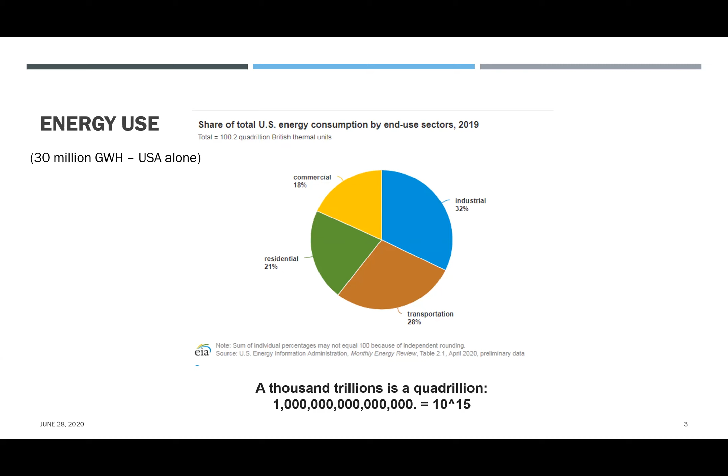So if you look at these major sectors, we are, all of us, from the time we are born to the time we die, always depleting energy in all these four areas, right? So in terms of how the world energy outlook looks, you can get a sense of how the different parts of the world are using energy.

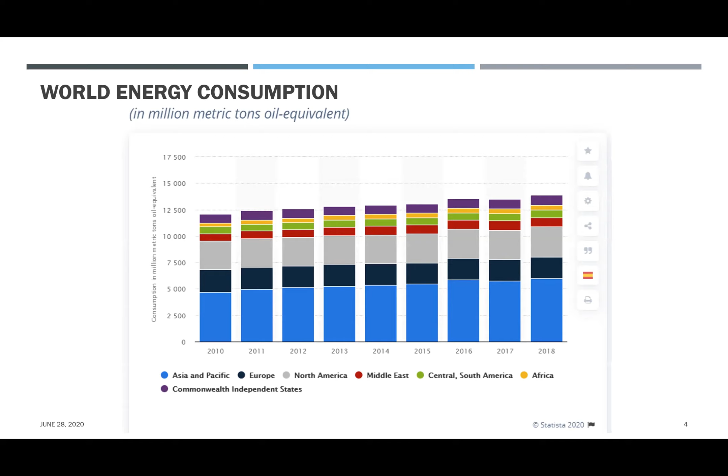Obviously, Asia and Pacific stands out as one of the largest users, as you can see from here over a period of years. North America is number 2 on the list, but it gives a sense that this is a worldwide issue, not just one country or two countries. It's worldwide as to how the entire world is depending on energy and constantly depleting energy as we speak.

So one of the interesting things I found about India, you all probably know, is that we in India are the third largest producer and the third largest consumer. If you look at all countries, that's amazing. Of course, we have a high population as well, but with all the manufacturing activities, data center activities, building activities, and high population, I'm not really surprised that we are the third largest. We have a capacity of 370 gigawatts in India.

And the good thing to know is that the current statistics show that the renewable and hydro combination is pretty significant. 36% is a pretty good number. And it's amazing compared to what it was 20 years ago. I suspect 20 years ago we probably had hydro, but no PV and no wind. But compared to that, we are significantly better than where we were.

So it is noted that agriculture is one of the highest consuming segments within India, which is not surprising because we are primarily an agricultural country in a lot of ways. The unfortunate part is all of us worldwide are still depending on coal. According to the statistics, I believe India's percentage of coal use is 55%, which is pretty comparable to what we see in the United States. I think the United States is declining, but 10 years ago it was probably as high as that. But fortunately, with greater awareness of pollution and greater availability of renewable energy technologies, that number is coming down.

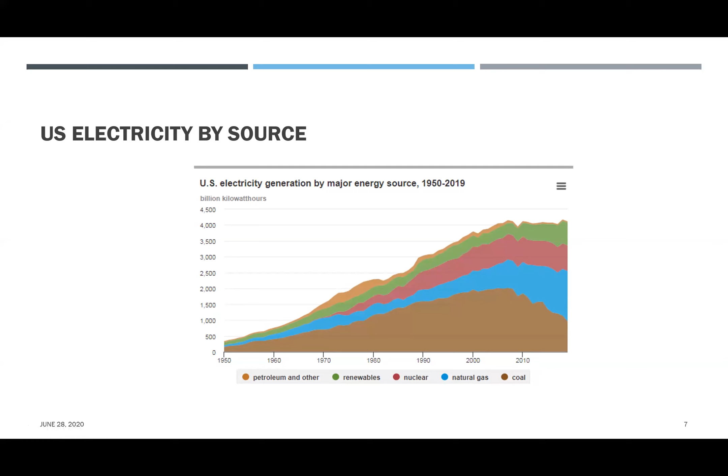As renewables have increased, the coal percentage has continuously gone down. Probably right now it's around 25 to 30% at the most, compared to India, which is at 55%. So I just wanted to give you a sense of some of the pollutants we worry about. The problem with combustion of coal is that while we don't see it, we have to worry about sulfur emissions, nitrogen oxide emissions, and the most deadly one of all, particulate emissions, which tend to accumulate in the lungs and the breathing passages and cause a lot of other issues.

And it is a bit sad that India has not been able to implement them. It is my understanding, based on what we read, that there are a lot of plants that are still without those kinds of controls. And there have been numerous studies that point to the industry and say, look, people's health is getting affected, implement those measures and so on. But it takes time and money and investment. But that's an issue we all face the moment you have a coal combustion device.

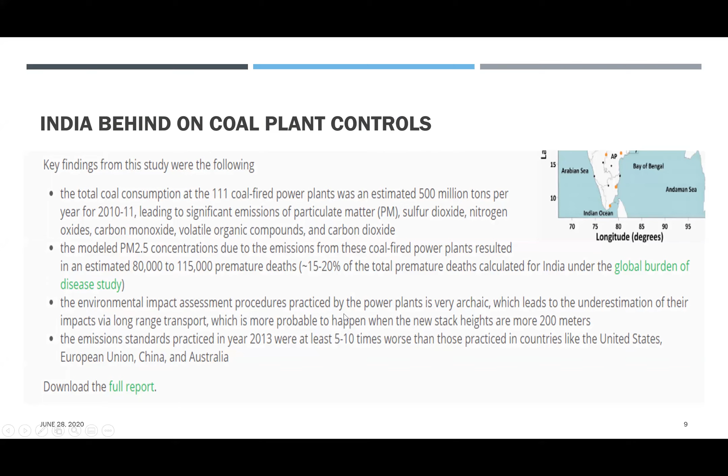What I want to share with you very briefly before I jump onto the renewables is some of the criteria pollutants, right? So when we talk about energy production in the United States, I'm sure it's all over the world, there are 5 or 6 criteria pollutants which are always monitored, because when you decide to put in a new power plant or a new combustion device, even if it's a small college that uses, let's say, a boiler for heating hot water, we need to go through the permitting to make sure that they comply, right? So what are the major criteria pollutants? Certainly many of you might have heard about this.

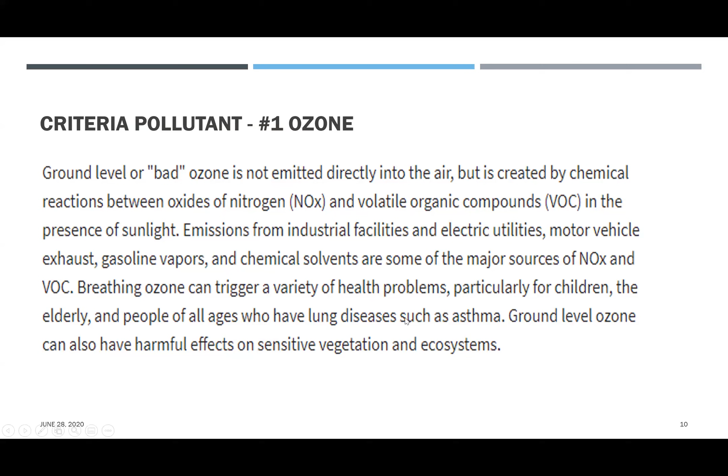Ozone, right? Ozone is the first one on the list. We have to worry about ozone at high levels as well as low levels. Each of them has a certain impact on the overall environmental health of the population. The next major pollutant is sulfur dioxide. We talked about the impact of coal combustion, right? Any fuel that has sulfur, including diesel, some of the petroleum oils, fuel oils, and coal especially, has sulfur content. So sulfur content in excess has a huge impact on human health.

The next major pollutant is particulate matter. The control technology for that is bag houses, electrostatic precipitators. A lot of times when you drive by on any Indian road, freeway, you'll see on the side people burning husks and waste and all that. You look at the dark smoke and the carbon and soot and everything else. You don't see the particulate matter, but anytime you see those kinds of combustion going on, even a fireplace at home, you are potentially exposed to particulate matter, which is unfortunate.

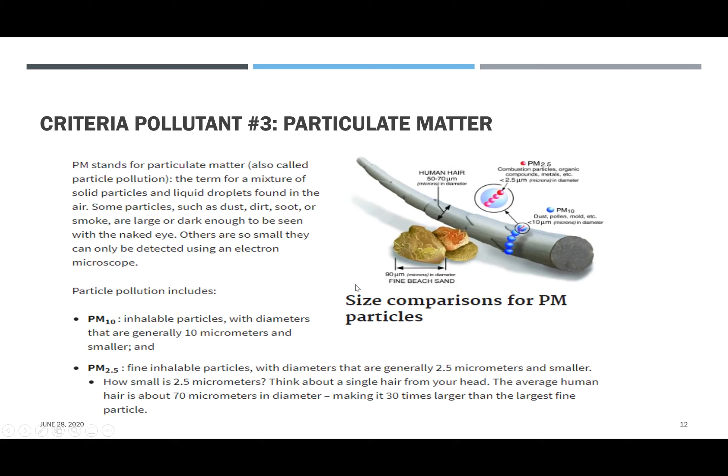And there are different grades. When they say PM10, they talk about particulate matter which is around 10 microns. PM2.5 is particulate matter that's 2.5 microns. So they have various ways of categorizing particulate matter so that the technologies for controlling them can be designed for capturing that particulate matter. Carbon monoxide, of course, everybody knows the danger of carbon monoxide.

Very often you hear stories about how people went to the garage, closed the garage door, left the car running, they got on the cell phone, kept talking. They didn't realize how the carbon monoxide level in the garage built up and they died. So you hear some stories of that nature. So carbon monoxide is a nasty component that can kill without persons being aware of it.

We hear a lot of stories, especially in American East Coast cities where we have in-house furnaces, right? Because the temperatures in East Coast, we're dealing with -10, -20 degrees sometimes in extreme climate. And a lot of the homes are designed with furnaces inside the occupied area. And if those furnaces misbehave, if they're not checked frequently or cleaned, and if they have a bad flame, we have heard stories about how carbon monoxide emissions from that furnace can kill people, right?

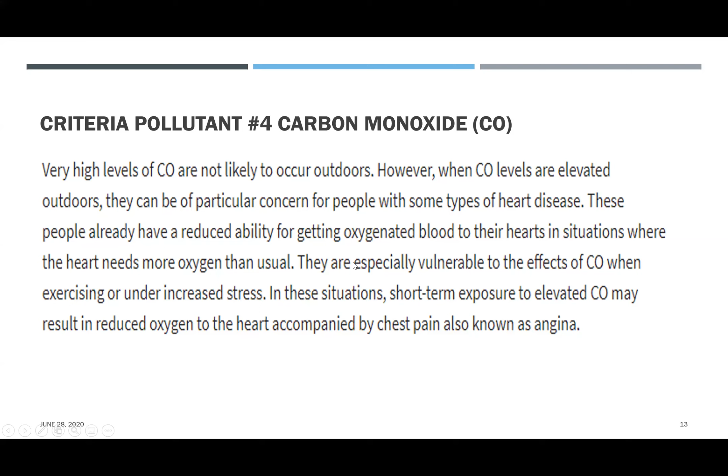So there are numerous dangers that we encounter daily in our life. So we need to be watchful of what those are. Nitrous oxide is a big deal, right? Obviously, it leads to smog and respiratory problems and all that.

So anytime we do a project here, we have to demonstrate, whether it's a boiler, whether it's an engine, whether it's a reciprocating engine, or whether it's a 25 megawatt gas turbine engine, we have to go through air quality permit districts to make sure that we have in place mechanisms to control the emissions within a certain limit, right? So those are all very tightly controlled.

We cannot do a project in most of the United States without tight justification that we have done a good job in controlling the emissions to what is known as best available control technology. It's called BACT. And the BACT continuously changes depending on what happens in the industry. They continuously tighten the grip on what the latest emission control technology should be for a project to be permitted.

So it's a constant battle. It's one of the biggest battles every project developer goes through, rightly so, when it comes to developing a project. And I hope there is an equivalent system in India, but I'm not sure. I've been out of the loop.

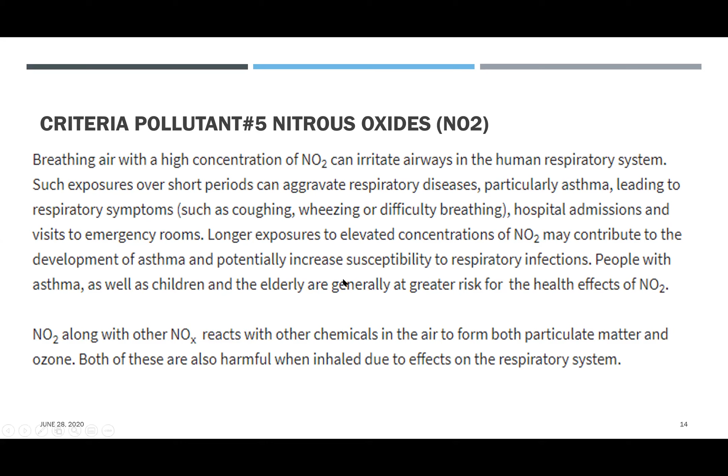So the last criteria pollutant we're talking about is lead, which is the 6th largest thing to worry about in terms of criteria pollutants. A project developer, when he's proposing a project or building a project, has to go through a permitting agency to make sure that the best available control technology is used for regulating and controlling the emissions, which is a very important part of the process.

And I just mentioned that I've been out of the loop from Indian permitting, so I don't quite know what process you have to go through, but hopefully there is something good that ensures that people like you and me are protected from polluting sources.

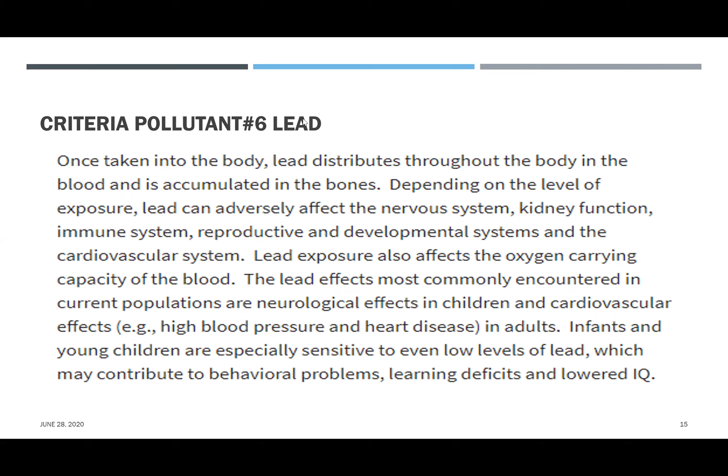All right, so before we jump on to the specific renewable technologies, the one thing I wanted to mention, I talked about greenhouse gas emissions, right? So the big deal right now in, I would say, 80% of the American institutions, especially colleges, large universities, is how do we operate buildings and systems to minimize greenhouse gas emissions? That's a really big thing in America right now, because we all realize that we as a society need to do better to make sure that there is no global warming.

And we need to make sure that we leverage the current available technology in renewable energy and try to minimize the carbon emissions, right? Which is part of the global concern on greenhouse gas emissions. So if you look at the major components of the greenhouse gas emissions, obviously carbon dioxide, right? That comes from the combustion source, whether it's coal or natural gas or biogas, we always have carbon dioxide emission.

We have refrigeration, right? We have chillers that produce air conditioning. The chillers have refrigerant that cause impact on the environment, that's why they're categorized as part of the greenhouse gas emission.

Then we have methane from landfill, right? As consumers, especially in America, we produce a tremendous amount of waste, right? Huge amount of waste, which all goes into landfill eventually. And the landfills have methane contribution. Fortunately, in many parts of the country, we have installed burners to burn natural methane that is produced in the landfill to produce power, right?

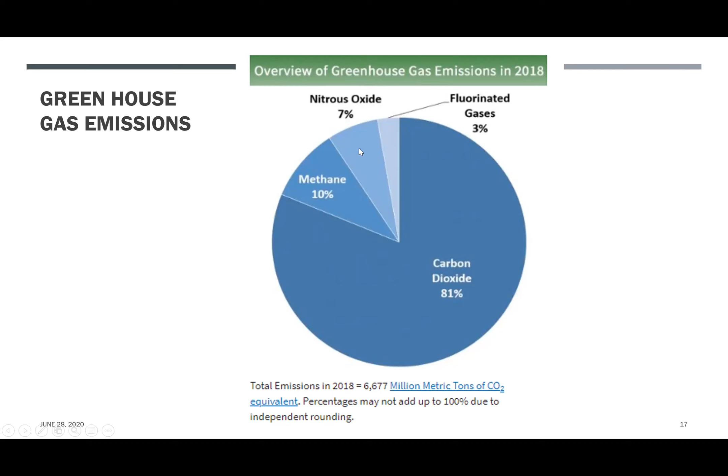So there are some places where landfill gas has been used effectively, but so long as we humans create a tremendous amount of waste, unfortunately, we continue to contribute to methane. And of course, nitrous oxide is also part of the greenhouse gas emission.

So now let's talk about how the photovoltaic industry has changed over many years. I started consulting in 1990. Those days, in fact, when I came to the United States in 1981, there was probably a single company in the entire country that was producing small size panels. When I say small, I'm talking about 50 watt, right? Think of a 2 feet by 4 feet panel, we're producing 50 or 60 watt those days.

And it was costing a horrendous amount of dollars. So people said, forget it. We don't have time and money to invest on a panel that costs you 10 times more energy than what we're paying. And that was the era in 1980 when I came to this country. But look how much the industry has transformed over the last 40 years. So the serious production of the panel probably started in the late 90s, and you can see the gradual depletion in overall cost compared to where we were.

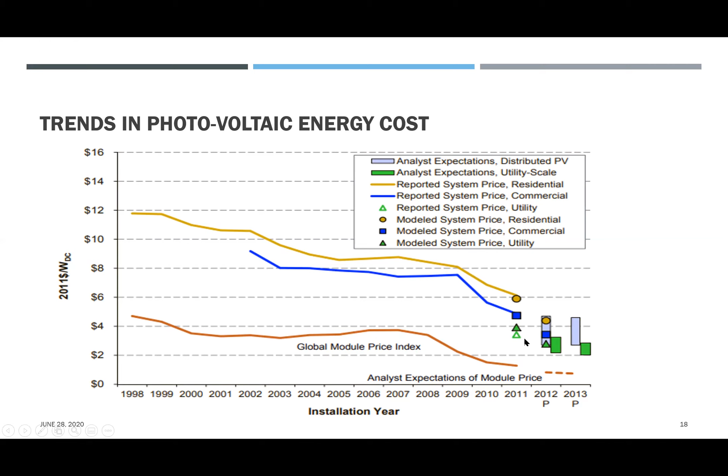And today, I believe some of the largest photovoltaic projects are priced at $2 per watt compared to what it was. So, thanks to the Chinese panels, there is a tremendous amount of production coming out of China. As far as the consumer is concerned, the price of energy has substantially dropped. I'm sure it's the same in India as well, that you're able to enjoy better prices compared to what it was.

I gave you a sense of all the infrastructure that goes into making a PV system happen, right? So if you start thinking about the various ranges of PV available, you can have PV at your home, in an office building, in a parking structure, or a ground-mounted PV somewhere far away from the communities. So there are many different locations where you can install photovoltaic. So the challenge is, what are the downsides of installing PV? What does it take to really maintain them?

Of course, a lot of times we put it on top of a roof of a house or an apartment complex, and we expect things to work, right? But things do require maintenance. So I just try to identify here the typical things that we have to deal with. First of all, you have PV modules. Over a period of time, depending on where you live and how much dust accumulates on it, it has to be constantly cleaned.

If you forget about it, a lot of times we get a call from a client saying, hey, Chet, can you come and check out why our PV system is not producing? You go there and look at plant weed growth, and you have things sitting on it. You have bird droppings, nobody cleaned. So unless you maintain the system, you cannot expect power out of it.

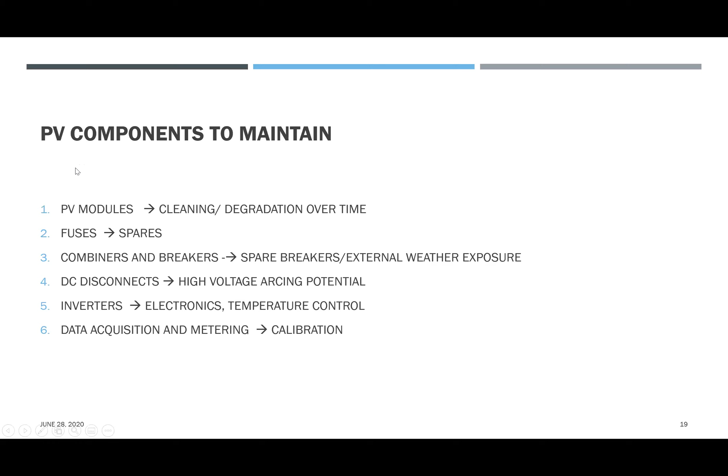So let's move on to the next topic, right? So now we have a sense of the PV in terms of what it takes to design, what it takes to maintain. Looks easy, but there are a lot of little details one has to watch out for. Now let's look at the wind turbine.

Now, the fascinating thing about the wind turbine is that when I came to California, I would say in 1982, we used to see one single turbine made by Boeing. That was like 1 megawatt. And every time we went by the freeway, on the way from Sacramento to San Francisco, we used to see the turbine, but I never saw it running. It had a whole bunch of problems. And that was infancy, right? But Boeing took the lead at that time to come up with a turbine concept, which probably hardly ran.

But the fascinating thing that has happened over the years is that today it's a common thing to see, in many parts of the world, turbines that are rated for 1 megawatt up to 3 megawatt, 4 megawatt, huge turbines. We're talking 200 meters blade, 180-meter blades. But there are many challenges, so let's go through a simple wind turbine component, right? What it takes to maintain a wind turbine. You got the blades. These blades are ridiculously long, and it's a challenge to transport the blades.

You have got bearings that allow for the rotation. If you look at a typical wind turbine, you could be looking at 120 miles per hour tip speed when the wind speed is 12 to 15 miles per hour. So you got huge distances, speeds to deal with. And look at the amount of design engineering it takes to design a blade that can run at that speed. Look at the amount of centrifugal force that is involved, the mechanism that is involved in building a very tall support structure to support the whole rotating component.

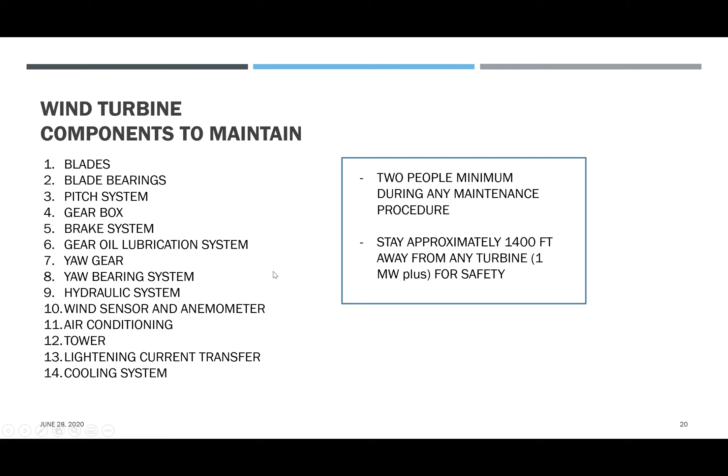The main thing you want to know is these technologies do exist. They have matured a lot, but we can never take it for granted. There are tons of things to maintain, tons of things to work on. Nothing is bulletproof. Over a period of time, you also heard about offshore wind and onshore wind; both are available currently.

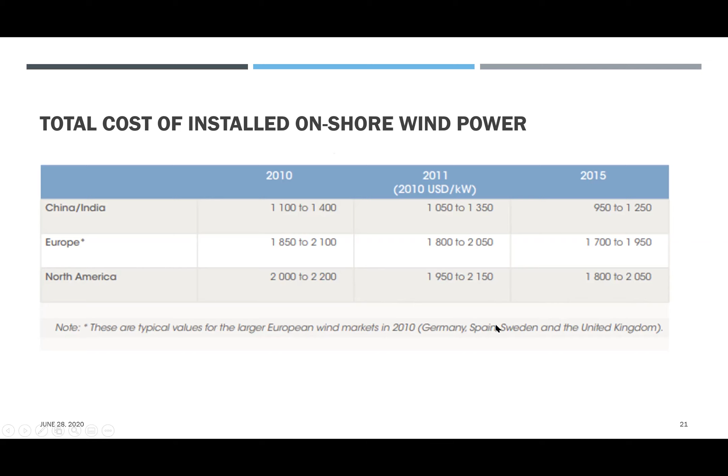But the good news, as I tried to show here, is that the cost in dollars per kilowatt has gradually come down, depending on where you are. For conventional power, a typical rule of thumb is about $1,000 per kilowatt. But the fact that PV and wind are currently available at around $2,000 per kilowatt is a pretty good step in terms of making renewable energy more affordable. Hopefully with time, they'll go down further.

Let's talk about some of the impact on the environment. Like I said, everything has an impact on the environment. No matter what we do, we can't run away from it. The biggest impacts of wind energy are two things. One is the impact on bird life and bat life, because birds and bats fly in massive swarms, and there's a big concern about endangering those species.

And the second big impact is noise. That's a huge issue, because when developers site wind energy, especially large ones, very close to communities, that's a problem. Typically a wind turbine system can be producing, right next to it, as much as 100 dB. As you step away from it, obviously the sound level decreases.

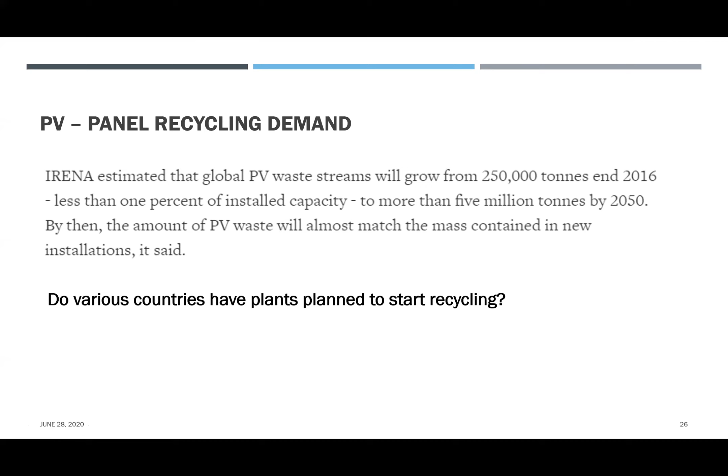So here's an example of the issue I talked about in terms of the quantity of waste that is created and what we have to watch for. And as we increase our PV production, our next generation, our children, our grandchildren, that generation will have to deal with potential disposal issues. So it's very important that we not forget our obligation in terms of planning for that scenario.

So hydro, right? Obviously you've seen hydro energy as well, and there are very large plants using hydro energy. And the biggest downside of hydro is the impact on fish and game, right? One of the state departments in California is a department called Fish and Game. Their only job is to make sure that these hydro projects are situated in such a way that they do not impact aquatic life, right?

That's very important. So it comes back to what I was saying, that no matter what you do, we humans are well known for creating an impact. We just have to figure out, is there a process available? Is there a permitting process in place? Is there a regulatory process in place? Is there somebody policing you to make sure that you do the right thing and not rampantly impact the environment?

And of course, hydropower, like anything else, you have to think about where the opportunities are, where there is enough water head available, where there is a natural dam available, or the possibility to collect the potential energy that water has and convert that into power. And the challenge is doing it in a safe way, right?

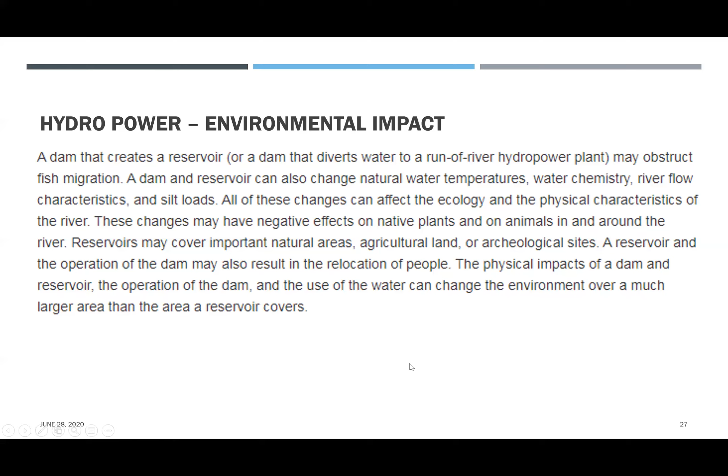So one technology that is quite popular, very expensive, unfortunately, is fuel cell energy, right? So fuel cell energy is basically taking a gas like methane or natural gas and breaking it down into carbon dioxide and hydrogen, and you allow hydrogen to mix with oxygen, and it produces power.

So the power efficiency of the fuel cell can be as high as about 40-45%, which is very good compared to a gas turbine combined cycle plant, which is probably around 37%. So we can get about 45 to 50% of just the power efficiency. Now, on top of that, if you're able to recover the heat, another, say, 30% to 40%, so potentially you can achieve an 80% efficiency in a fuel cell.

But unfortunately, the cost: remember I mentioned about $1,000 per kilowatt is kind of the standard default for conventional power. So these can be expensive. This can be $3,000 to $4,000 per kilowatt. Although we have installed these in some of the campuses, one of the first projects we worked on was a project here in Cal State Northridge. The same company installed, I believe, a 1.5 megawatt fuel cell, if I recall correctly. It takes a good amount of money and investment, but it's interesting technology compared to the conventional.

So does it take more maintenance and more cost than PV? Yes. So for the same reason, I think when customers have chosen fuel cell, it is mainly because they wanted to use both power and heat together, as opposed to just power alone.

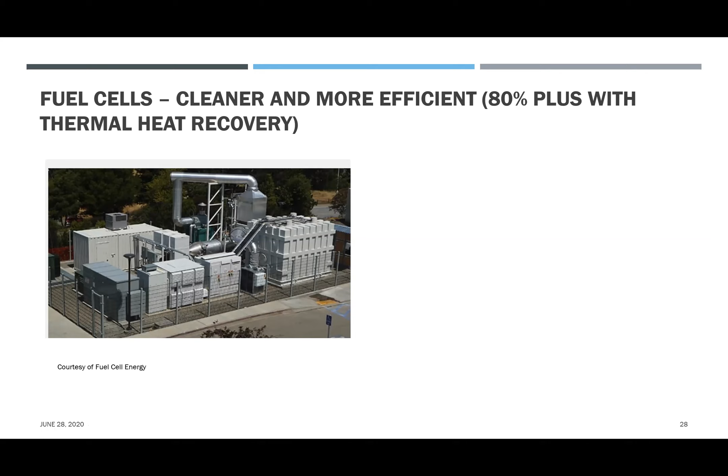So just to summarize what we talked about on renewable energy, although you and I can put PV panels in our homes, which is not a big deal, right? We have a small power. But when you start thinking as a developer who wants to develop large photovoltaic projects or wind energy projects, you have to think about the transmission infrastructure, right?

So the transmission infrastructure is existing. Utilities own it, at least in the United States. You have various public utilities. You have utility investors who have funded the utilities to provide large transmission infrastructure.

So if I have a transmission infrastructure that can only support 50 megawatts, let's say the wire size on the poles that go across the hills and mountains is about 50 megawatts, and I'm a wind developer coming in and saying, okay, I want to put in 100 megawatts of turbines. How in the world is that going to happen, right?

So you need to make sure that when you select a site, you consider the available limitation of the transmission infrastructure so that the power you produce can be effectively transmitted from point A to point B. So it's a huge limitation. One of the biggest challenges worldwide, especially in the United States, is we have huge bottlenecks.

Although we have a very wide transmission network, and I'm sure the same thing applies to India as well, these are old infrastructure. It takes billions of dollars to refurbish them. So you might see a phenomenal potential of PV or wind energy somewhere, but it's impractical to deploy it unless the utilities invest in upgrading the transmission infrastructure to bring the power from point A to point B. That's very important.

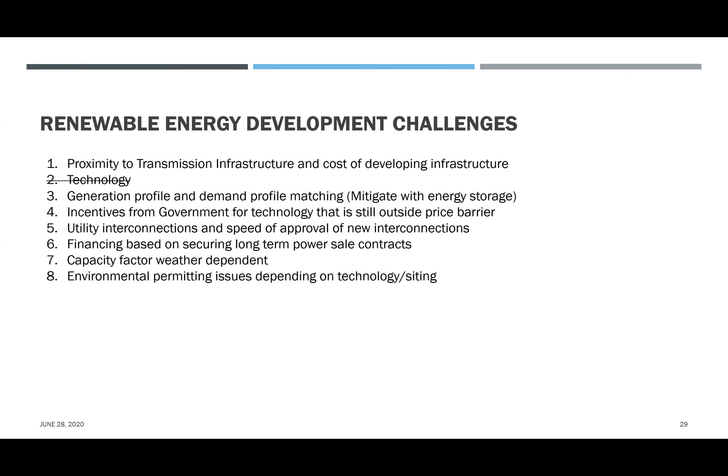One of the reasons the photovoltaic industry took off was that for a long period, I'm thinking almost a 10-year period, the utilities were made to provide incentives, called self-generation incentives, so that developers can make use of the incentives to build those projects. Fortunately, we are in a place in the United States where incentives have been provided for photovoltaic, wind energy, and so on.

So the next thing I want to talk to you about is energy storage. PV is a good example, right? So we have, let's say, a photovoltaic project that produces power during daytime. And a lot of times your demand is not there on weekends. I might have high demand on a weekday, but Saturday and Sunday I may not have demand because the business is closed. So how am I going to store the energy, right?

Or if I want to just shave off peak demand, let's say, typically in most utilities, the peak period is always the most expensive period, whether it occurs in late afternoon or evening. So we have battery storage technology currently.

Now obviously battery technology is also new, right? It's gaining popularity slowly for two reasons. Number one, of course, is the ability to store energy in an efficient way and use it when you need it. And the second thing is it is actually helping peak demand shaving, right?

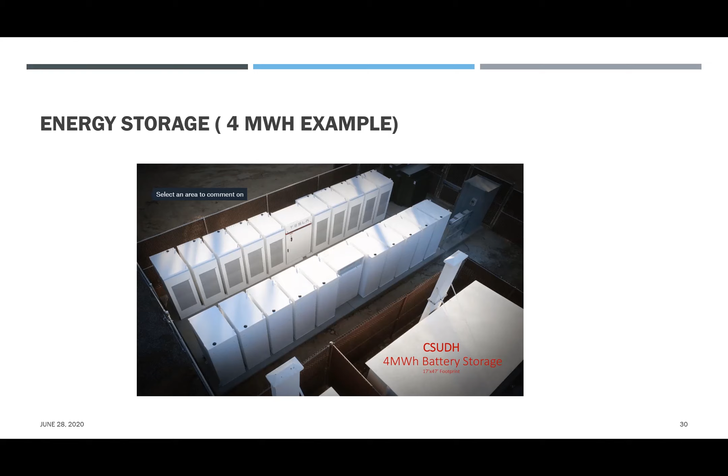And it applies to honestly both residential and commercial. I know that there are many homes and apartments in India already using batteries, but this is a little more advanced, more efficient battery system where you can use your PV energy generation, store it, and use it when you need it. So just like we have storage for electricity, we also have storage for other things, like chilled water is a good example, right?

I mean, you and I probably work in office buildings that are typically air conditioned. And generally speaking, during daytime when it's hot, that's when you don't want the equipment to run because there's already enough demand on the utility. Of course, these days we have PV power, but 10 years ago, we didn't have photovoltaic power, right? So how do you avoid running air conditioners during daytime?

So what we do is we actually have cooling devices that run at nighttime, store cold water, chilled water we call it, at let's say 39 degrees, 40 degrees temperature in a storage tank. These storage tanks can be 100 feet tall by 80 feet diameter. Think of it like a large building, except it looks like a big tank. So we can store the energy in this storage tank and draw it during daytime to cool the building. So that's a pretty common thing that we see.

In fact, I'm working with CSU, California State University System, which is one of the largest university systems in the world. So literally every campus within the California State University system uses this technology for minimizing daytime demand. And also, when we run the chillers at nighttime, we actually use less energy because the nighttime temperatures are lower for the wet bulb. That makes the heat dissipation a lot easier from the cooling towers. So that's the technology that we use to help overall reduction in managing overall energy resources.

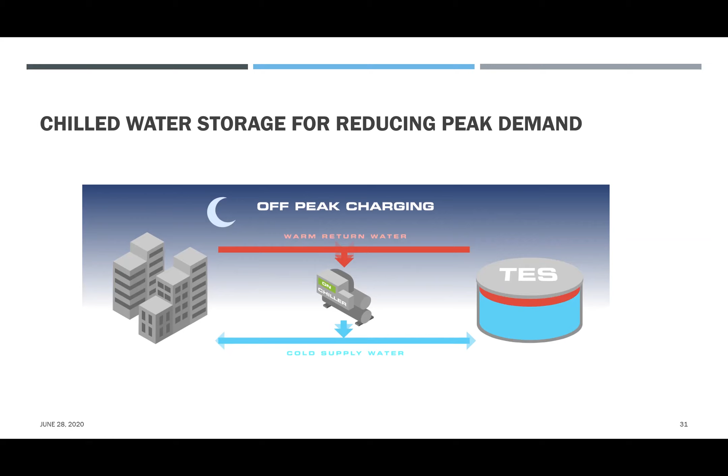Now let's step back. You heard me talk about the various aspects of the industry, and let's say that you're an aspiring developer, entrepreneur who wants to develop renewable energy, whether it's PV or wind energy. Just think about some of the challenges and the players that are involved in this development, right? So let's assume for a moment that you're a developer. You are the lead when you're the developer, because you need to bring all the parties together to make things happen, right?

So one of the biggest things is you got to deal with permitting, right? So when you decide to build a project, you need to worry about, is there transmission capacity? Is it permittable? You need to deal with public utilities. What kind of a relationship am I going to have? What kind of interconnection agreement do I need to have in order for my project to connect with the existing utility? Because ultimately, you're not going to build brand new transmission lines. You need to depend on the utility to provide your transmission line.

So there are strict requirements on how a project should be tied to the utility. There are strict requirements about how a project will impact the environment, whether it's hydro energy, whether it's wind power. There's always a permitting issue. Now, the reason that's important, and I'll get to that shortly, is that when you think of a global scale, the entire nation's transmission system or a state's transmission system, it's a very complicated system because that system consists of existing power plants. These can be large power plants, 50 megawatt, 100 megawatt, 200 megawatt plants that are expected to meet the consumer demand at all times. So the utilities are required to provide the required capacity to every consumer, right?

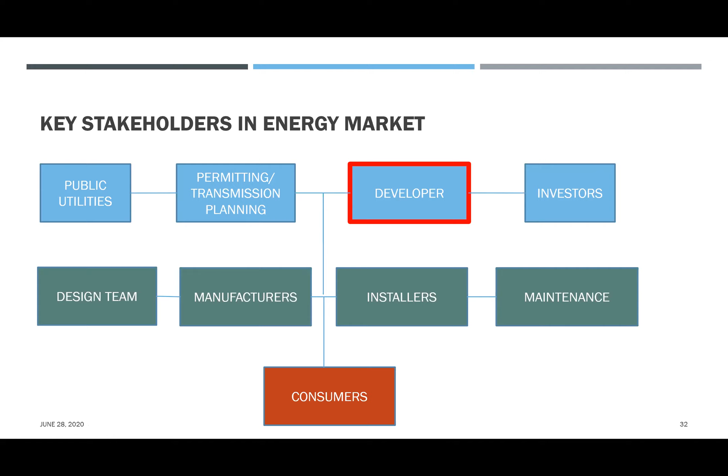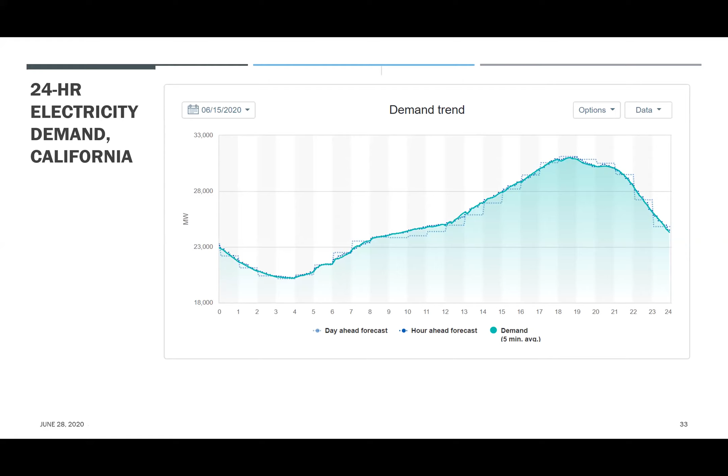And like I said, it's a challenge because the utilities have a job to do. They have to meet the demand of the ultimate consumer, like you and I. And you have all these power production devices coming on. So it's a huge challenge balancing it. But having real-time data helps. So we have systems in place where we can literally see current demand statewide so that generation resources can be planned accordingly.

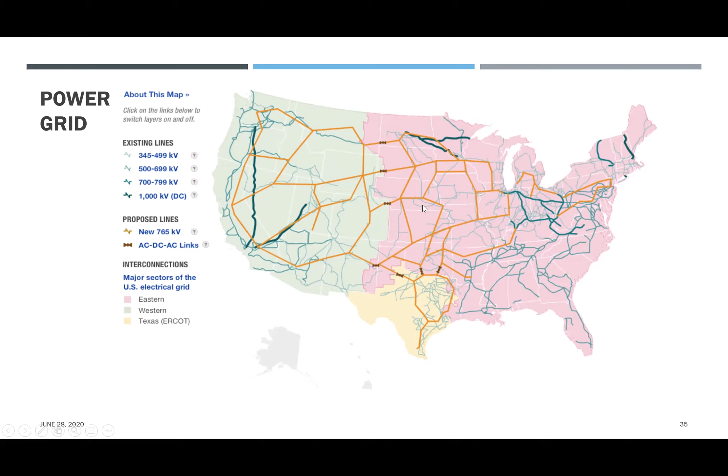To simulate power flow is a huge challenge, and you'll see many electrical engineers, PhDs, working on understanding how well the entire nation's system of power flow can be controlled as people bring on more and more renewable energy. So as consumers, we may think of renewable energy in a very small, discrete segment, like rooftop or whatever, but you have to step back, look at the bigger scale and understand the complexity of dealing with it at a national level, a regional level.

So, as one of the last slides I have today, I think slide 37, you got a glimpse of the big picture, right? We looked at how we're all using energy. You looked at the various energy sources. We looked at the potential technologies. We tried to understand and discuss the challenges with each technology. I also gave you a perspective of what a developer goes through to develop a technology. If you look at all that, let's just pause for a moment and think, right?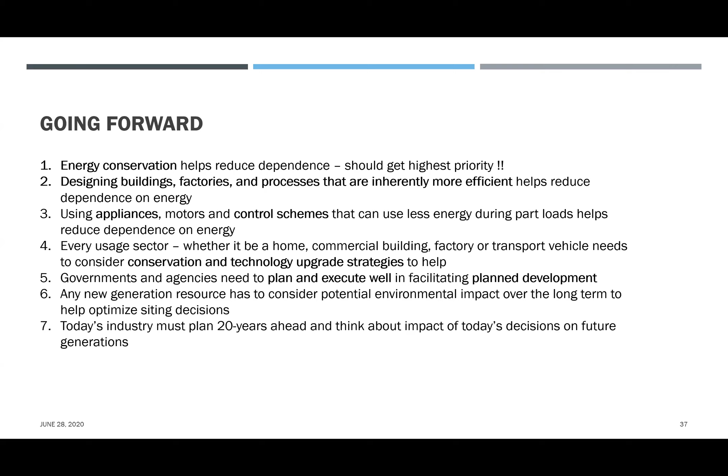Yeah, so it is an economic trade-off, right? So in theory, you could say that, well, we design a structure for speed of X. How is the structure going to be impacted if we get hit with a major wind storm or hurricane that is much more than that? Unfortunately, there is no easy answer to that.

When structural engineers design, remember again, we have to think about different things here, right? The permitting agencies will essentially create a regulation that says that when you design a project today in 2020, in this location, the current standards are 150 miles per hour, right? And that's based on published building standards and all that. It does not mean that the structural engineer can limit himself to 150 miles per hour.

He could evaluate based on a factor of safety that says, okay, although the regulation is based on 150 miles per hour, I will use my discretion, assuming obviously there is an implication on the funding. I'll use my discretion to provide a factor of safety, because that's purely a decision between the engineer and the developer. Because so long as the developer is willing to pay for it, the engineer can design some superstructure.

But at some point, we have to make the call, right? I mean, you cannot make anything indefinitely bulletproof. There's always a risk involved. And so long as you make a reasonable decision about what the factor of safety should be, that should be adequate. So if your question is if a PV project installed in the mid-2000s with 100-year history of wind pattern could not have accommodated for the weather we are seeing today, that's very true.